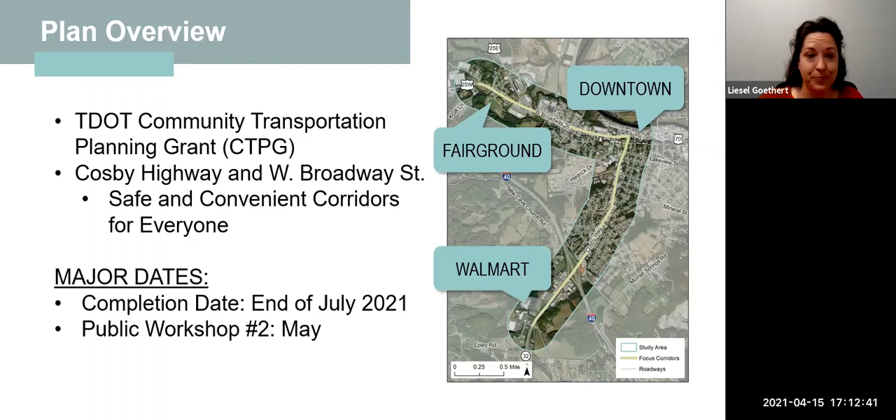So what exactly are complete streets? Complete streets is essentially providing the right street in the right place, ensuring that the design of the roadway, as well as the facilities provided for bicycles and pedestrians, make sense for that context and for the types and amount of users out there. The ultimate goal is to provide safe and convenient connections, particularly for the most vulnerable users of the transportation system—those on foot or bicycling.

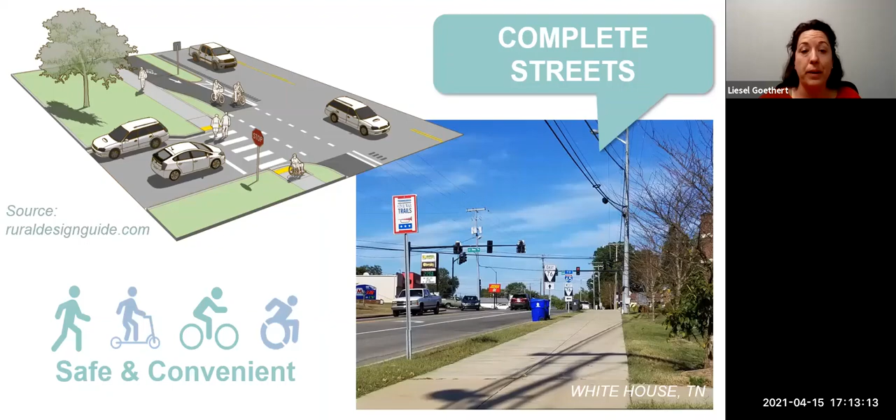Some high-level outcomes of this plan effort will be infrastructure recommendations, such as roadway improvements like restriping, as well as pedestrian and bicycling infrastructure recommendations. One of the other major deliverables is the design guidelines—identifying for each segment of our study corridors the cross section most appropriate for what's out there today, and also what we envision those corridors to be in the future. Finally, a complete streets policy will be developed and provided as well.

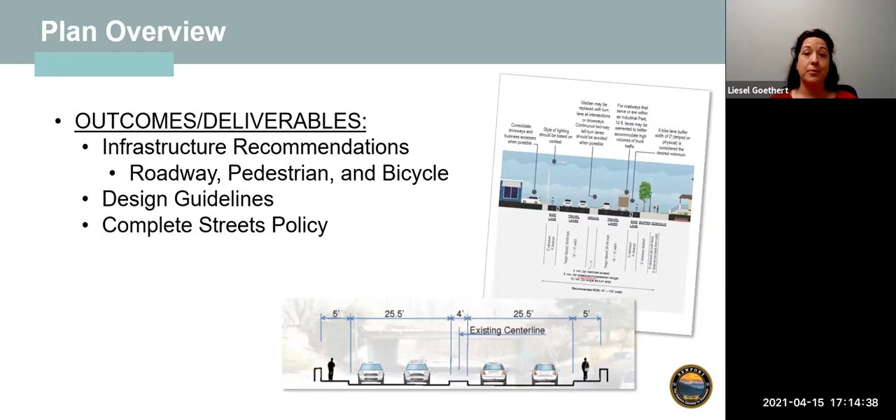This essentially formalizes the community's commitment to considering all roadway users when designing a roadway. Having a policy like this also positions the community well for securing grants from TDOT, for example, for construction of new sidewalks. The fact that Newport now has a plan outlining recommended improvements, along with a complete streets policy, signals to TDOT that Newport is committed to providing safe and comfortable corridors.

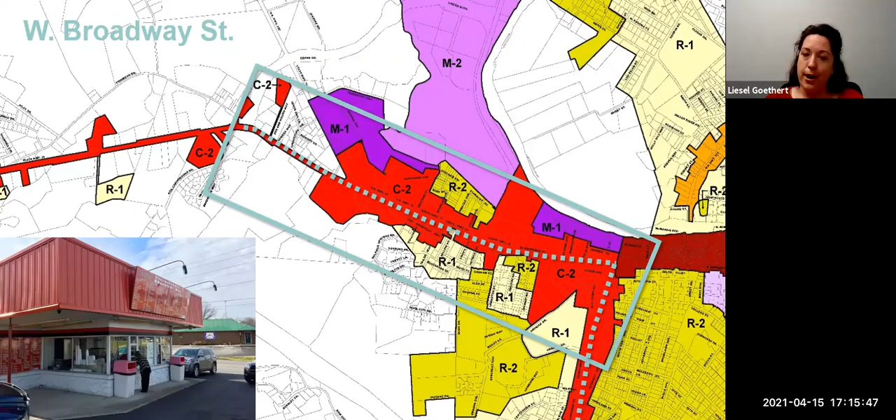Once you get off the corridor, we're looking at connectivity to the corridor from areas such as the yellow with R1, R2, those residential areas, so certainly looking for connectivity back to the corridor. Further off the corridor, there are also some existing industrial manufacturing uses.

So in terms of the existing conditions of West Broadway, at least on the most western side, it's a 5-lane cross section, very wide. It does have curb and gutter. There are shoulders, 2 travel lanes in each direction with a 2-way center turn lane. There are no sidewalks, however, in this section of the study corridor.

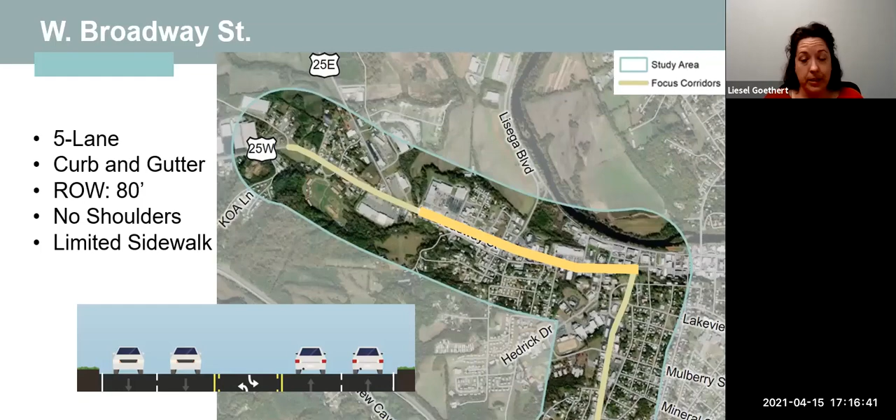As we move along east towards downtown Newport, West Broadway Street slightly changes in that the right-of-way gets a lot more narrow, approximately 80 feet across the highway. There are no shoulders in this section as illustrated in the cross section, and there is very limited sidewalk as well.

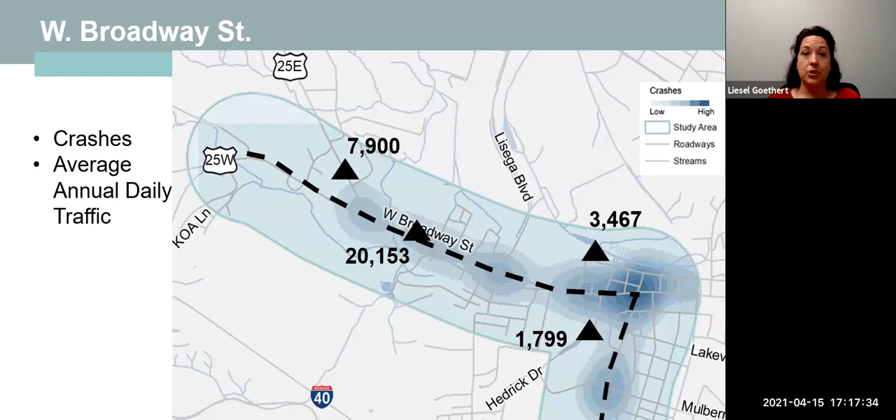The numbers that you see on your screen are your average annual daily traffic numbers, so your number of vehicles per day on average. As to be expected, West Broadway has the highest amount of traffic. That's to be expected given the size of Newport and the structure of the roadway network, as well as the uses given the destinations of commercial, again being critical destinations for the community.

As part of that coming project, there will also be intersection improvements along West Broadway, providing a bit safer crossings across the corridor in that location, specifically given the high school located there to the south.

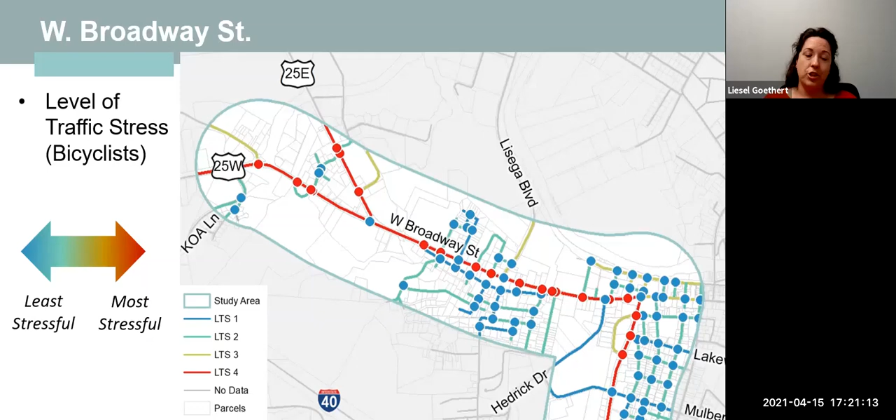So the project recommendations that we're aiming to develop as part of this plan are going to be aimed at how do we make some of these locations less stressful for the majority of the population that might be walking and bicycling.

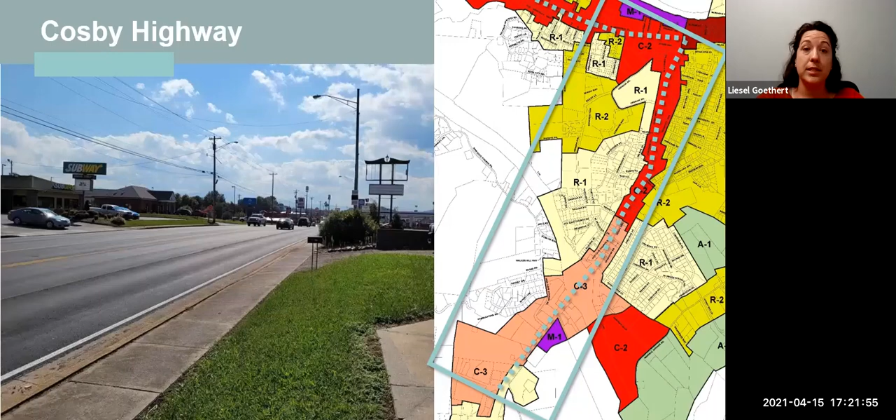Now we're going to take a look at Cosby Highway. This is on the northern end, with the terminus at West Broadway near downtown. It's a similar corridor in that the uses are largely commercial, also in a suburban development style, as you can see in the picture to the left. Many of the food establishments are drive-through, so it's certainly more of a vehicle-centered corridor with commercial all along it, and residential off the corridor. We'll certainly be looking for connectivity to those neighborhoods to Cosby Highway as well.

The northern section of Cosby Highway is a 5-lane cross section similar to West Broadway Street. It does have curb and gutter. The right-of-way is roughly 84 feet generally. There are no shoulders in this section of the corridor. However, there are sidewalks on both sides, which is beneficial for those walking. Even along the northern side of the corridor, those sidewalks have buffers, so green space in between the travel lanes, providing a less stressful experience than those right up against the roadway.

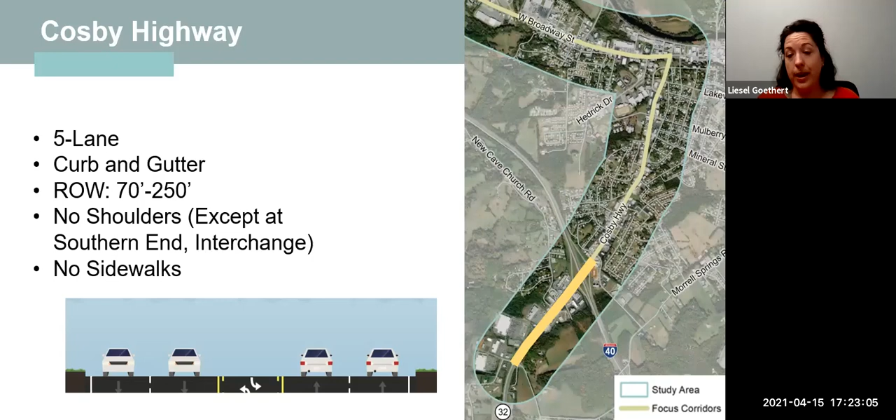The southern portion of Cosby varies, because of the interchange and as well as on the southern end of Newport city limits, the roadway opens up with greater right-of-way and shoulders. However, it does still maintain that 5-lane cross section with the center turn lane in the middle. This section also has curb and gutter as well. The right-of-way varies based at the interstate interchange, roughly 70 feet to 250 feet at its widest portions.

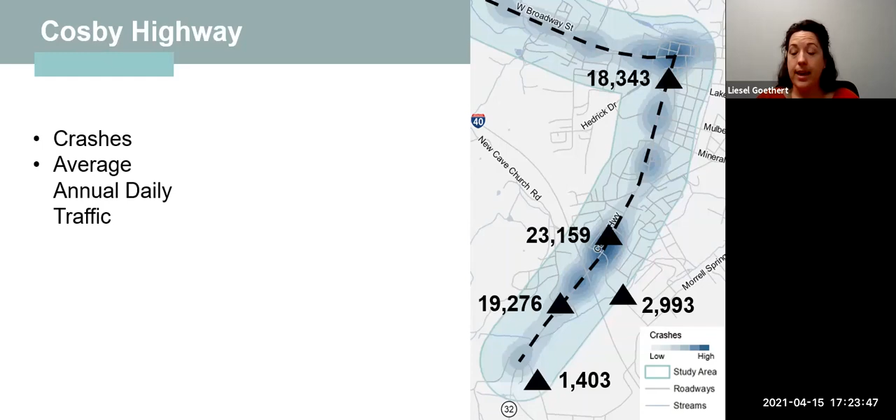This is also showing the crash heat map, of crashes that have occurred in the last 5 years. You can see those crash hotspots occurring at your major roadway intersections, with West Broadway Street being one of the higher nodes of hotspots for crashes. Here you can see the average annual daily traffic, again to be expected - the highest volumes are found along Cosby Highway, and they get less as you get away from the corridor.

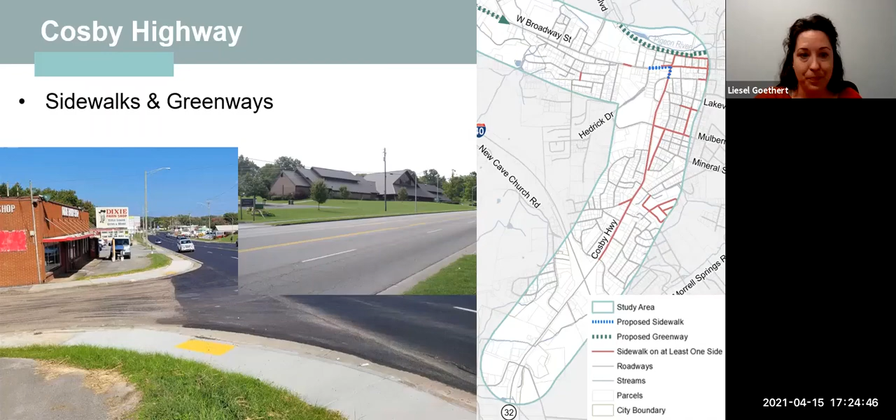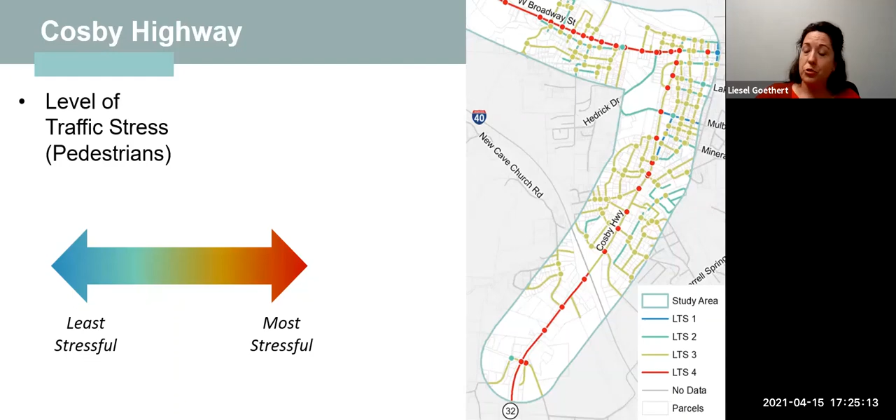Level of traffic stress, this is for the pedestrians. The intersections are all fairly stressful, and while there are signals at some of those intersections, there are not striped crosswalks or pedestrian signal heads giving pedestrians the right of way at the traffic signal. Therefore, they are considered to be very stressful for pedestrians. So we'll also be looking at crossing improvements, just as we will be with West Broadway.

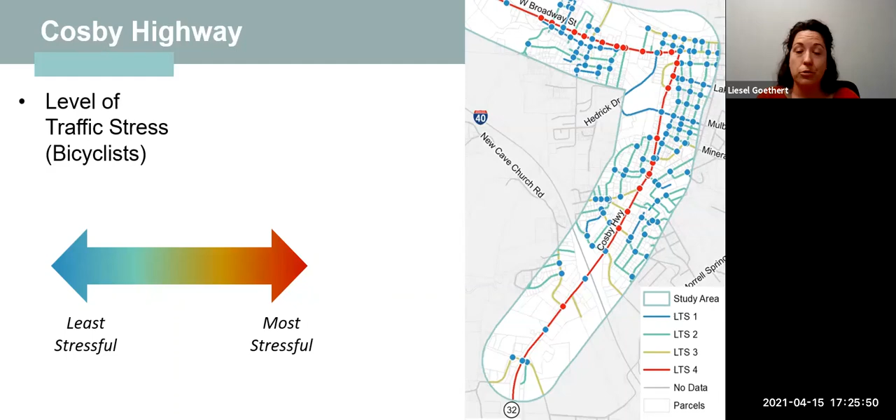This is the level of traffic stress for bicyclists. Again, you're seeing a similar situation as you did on West Broadway. There are more signalized intersections along Cosby Highway, which you're seeing the blue dots there. For a cyclist, a traffic signal makes that crossing the least stressful because a bicyclist acts as a vehicle - just like driving, pulling out onto a highway, that signal gives you the right of way. So for bicyclists, those are your lower stress intersections for making those crossings.

Some of the engagement to date - we've had great response on the online survey and Wikimap.

I should say that the survey and the Wikimap are consolidated for both planning projects, the corridor study as well as the one occurring in downtown. It is open for one more week and will be closed on April 22nd. We've had over 135 surveys completed thus far, with some additional comments made on the mapping option.

So some of the things we've heard so far: the top destinations within our study area. The top three were by far downtown, the fairgrounds toward the northwest end of the West Broadway Street corridor, and the old Tanner School, Walter State Community College.

We also posed a question to respondents: how should Newport focus their dollars, expanding the network or maintaining it? The majority responded to expand infrastructure in areas with little or no existing infrastructure, thinking back toward the southern end of Cosby Highway.

There were also several comments, especially on the mapping application, to look into back access of commercial properties along both corridors for opportunities to include greenways, providing a separate facility away from the corridors and vehicle traffic—a safe, completely separate facility on the back side of the buildings for a less stressful and safer walking and biking experience.

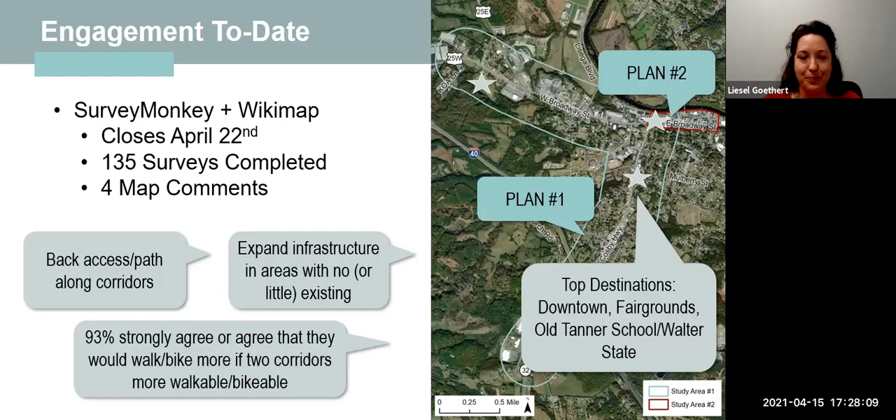In order to reach that long-term vision, some of the goals include promoting Newport as a gateway community. That's an effort Newport has identified in previous planning efforts, to be a gateway community to the Smokies and tap into the outdoor potential the community has given its location at the foot of the Smoky Mountains.

The second goal to reach that long-term vision is to improve traffic and safety. The third is to optimize street design for all users, providing a complete street in the right place. The final goal is to support active lifestyles—something identified in previous city planning documents, reflecting a desire for residents of Newport to walk or bike for recreation or utility purposes.